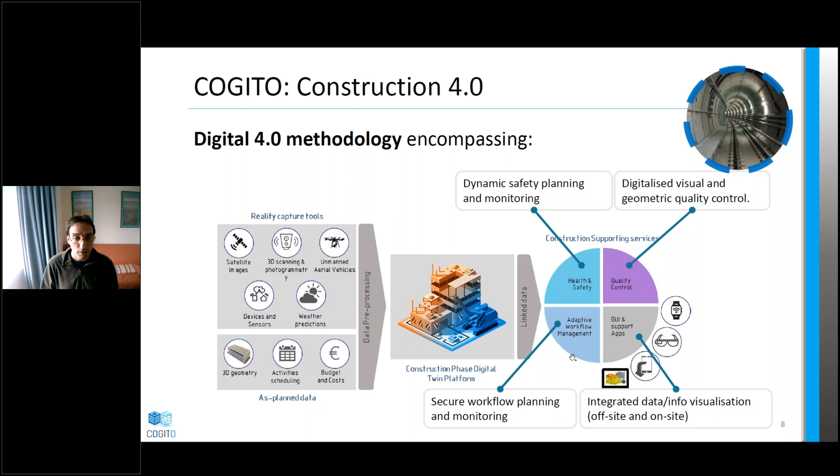And at the lower left, you see workflow management. So this is about securing the workflow planning and automating the monitoring of progress on site and the workflow overall. And finally, at the bottom right corner, we are developing a couple of applications that provide means to visualize the information in the digital twin platform and also interact with it and make some decisions.

To go slightly more into detail, as you can see at the heart of our solution is the digital twin platform. And the solutions we develop can be grouped in 3 ways. The first way is we develop solutions that are applied during the planning phase, so just before construction actually starts. Here, using the planning data, which comes in the form of an as-planned 4D BIM model, we plan safety measures. So we essentially process the BIM model to generate what we call a safe 4D BIM.

We have, I should say first on the right-hand side here, quality control related applications with the aim of planning all the quality control that will need to be conducted during the delivery. And all this information is integrated into some applications for planning the workflow and the work orders in detail.

Now, once the planning phase is finished and we finally start construction, then we similarly have a range of applications that aim this time at monitoring safety during construction, monitoring quality control, that is essentially implementing all the quality control tasks that have been planned during the planning phase. And all this information alongside IoT data, typically location data captured in real time on the construction site, is used to monitor the production and the progress of the construction site and make decisions as to revisit the workflow, optimize it in different ways, etc.

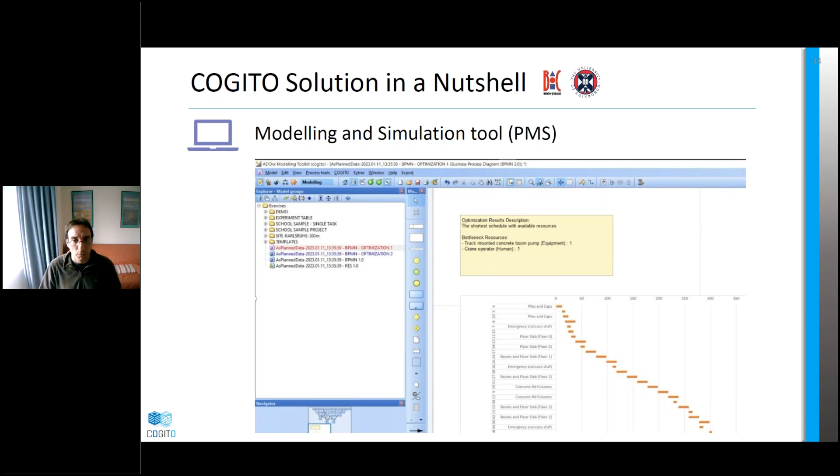As I said, in combination with WODM, we have this service level agreement manager and blockchain smart contract technologies that are there to secure the work orders so that progression and completion of work orders is secure and cannot be hijacked in a way or played with and cheated.

Novitec also develops another sister application, the Work Order Execution Assistant tool, WOEA, which is a mobile app that also runs on augmented reality goggles that is there to inform workers on site about the work orders allocated to them and enables them to report progress on them, and also gives them a range of other facilities in terms of taking pictures, calling somebody to get advice, etc. You'll hear more about this.

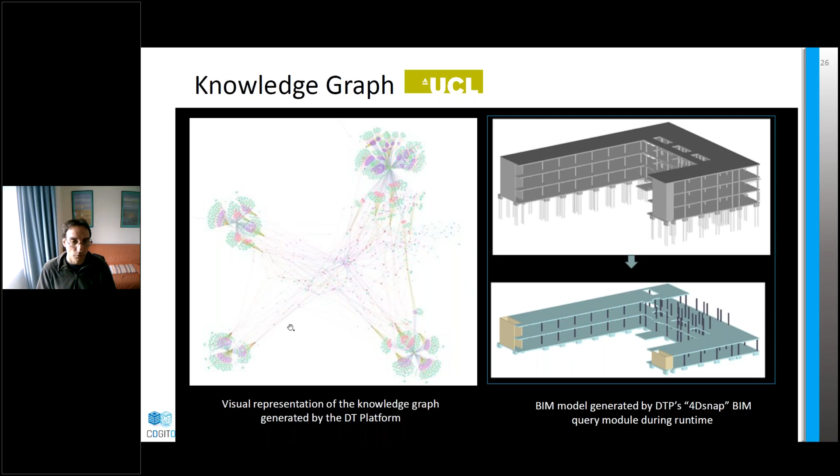So that's me. I hope the introduction was useful to you, and I will now leave my colleague Damiano Falcioni to talk to you about the PMS toolkit.

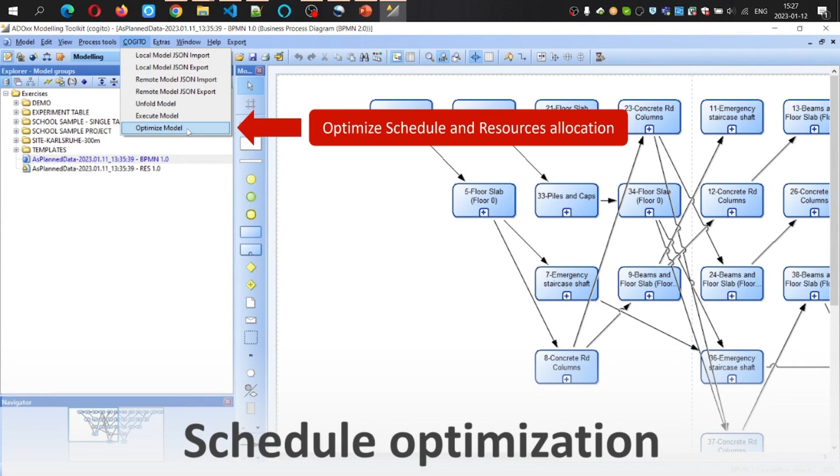As soon as we've completed it, we can proceed with the next part, that is the optimization. The optimization runs in order to find a better schedule alternative.

Actually, the integration with the service was still not finished in this video, so we'll see some manual steps that are not needed currently, like the export of the schedule, the execution of the script manually, and the import of the optimization result. This is all integrated now.

At the end, the optimization will return the identified alternative schedules, two in this case, and a new model will be created for each schedule. Such a model contains the original activity configured by the optimized schedule, and also additional notes like a description of the result - in this case the shortest schedule with available resources, and the bottleneck resources. Also, a Gantt chart of the schedule is provided in order to better visually see the difference with other schedules.

Additionally, there is also information for each activity, like the late start and end time, early start and end time, and whether the activity is critical or not. That is also visible from the red circle near each activity box.

Now we can go to see the other result, which in this case is the cheapest schedule. And here we can see that we have the concrete pump and the crane operator as critical resources.

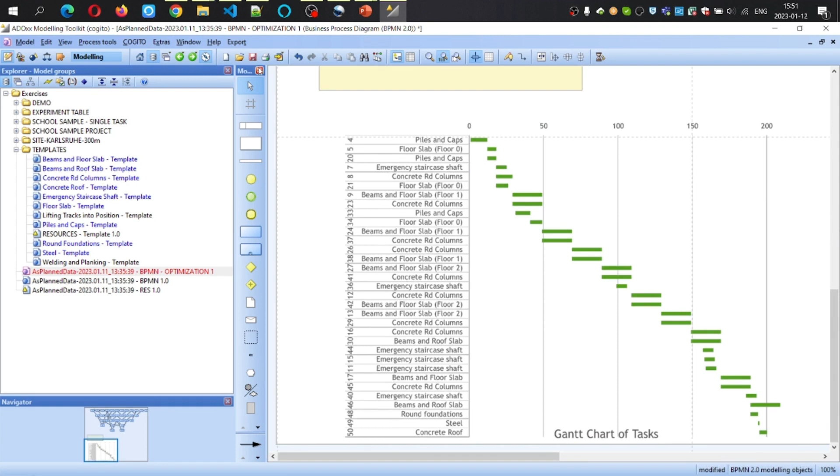Now we are ready to decide which final schedule we want to use, and then we can export it to the digital twin platform for later processing and execution by the other COGITO tools.

Again, we have to log in first to the COGITO platform for this feature, and then select the project where we want to upload the enriched schedule and the model to upload. And after the upload...

What we receive is the ID of the created collection in the COGITO Digital Platform. Just for testing purposes, we can quickly access the Digital Twin Platform to check this by opening the section related to the PMS application and the endpoint for the upload of the schedule.

Here we can see that the new collection has been created, containing our uploaded JSON file of the model.

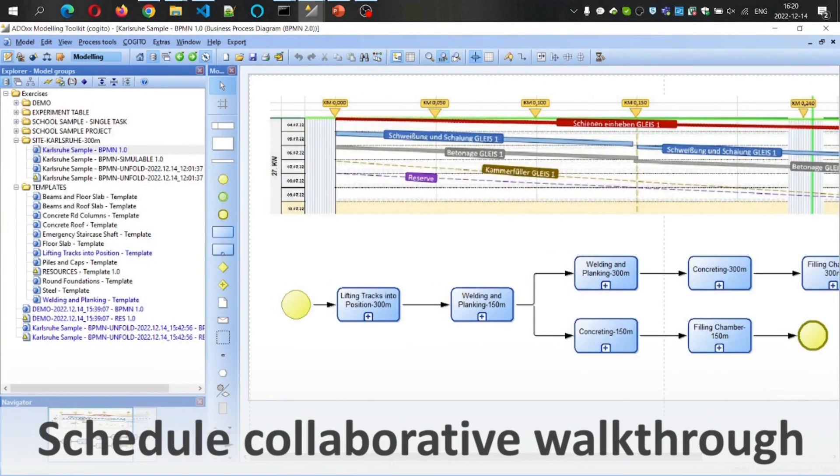One last feature I would like to introduce is the validation of the enriched schedule through a collaborative walkthrough using a design thinking approach.

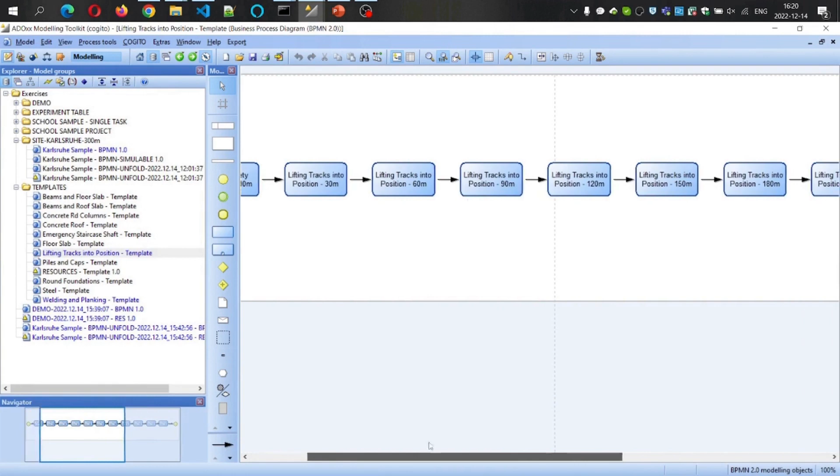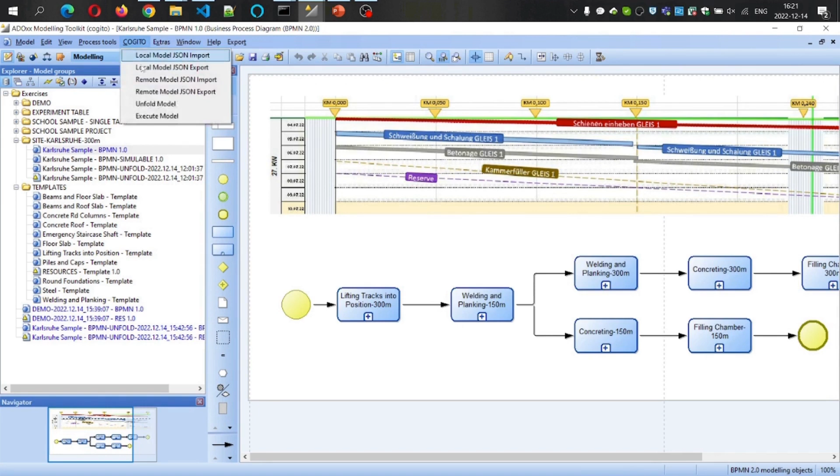For this demo, we use another use case about the construction process in a railway track, where each original activity is again split - like here, the lifting of track into position is split into placement of safety barriers first, followed by the lifting of each track section in sequence, where the crane operator and the worker are used.

We can now go through the schedule, execute it, and generate a report for the execution log. This functionality basically guides us on the activities that we can start, and after the selection we get instructions on how to perform such activity, including the planned start and end time, and the resources that have to be used.

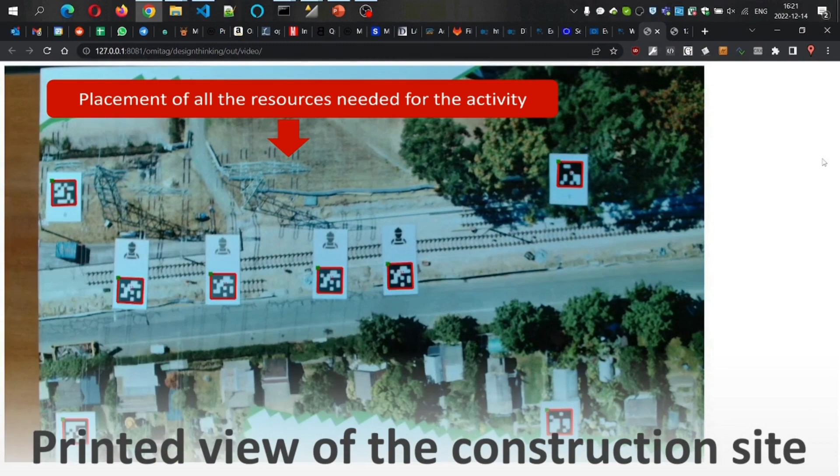We now use this information to recreate the scenario, positioning the needed resources on a printing of the construction site, where the resources are represented as paper figures with unique markers that are recognized by a camera. This camera is used to take a snapshot of the current scene in the form of a model containing the identified resources.

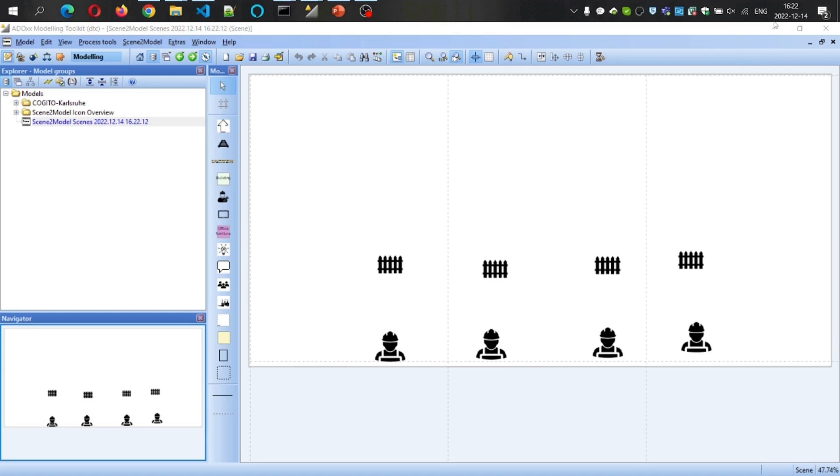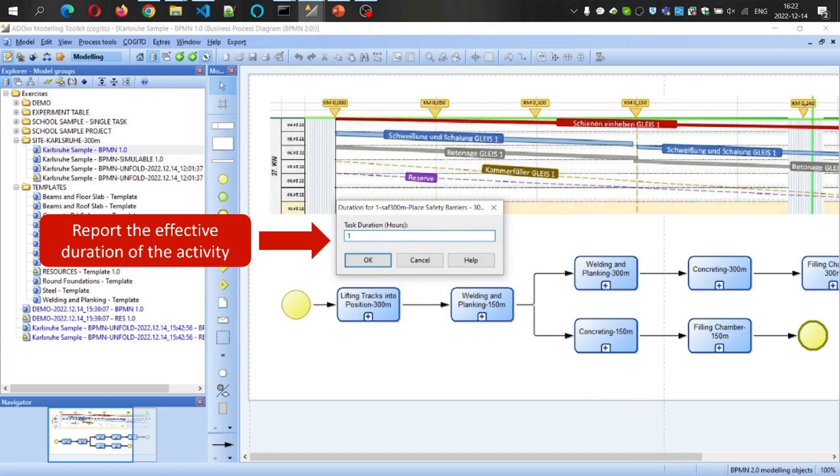Like in this case, we can now set the activity as complete, and also report its actual duration, then proceed with the next activity in the schedule. In this case, for example, we have the crane, the operator, and the worker as resources.

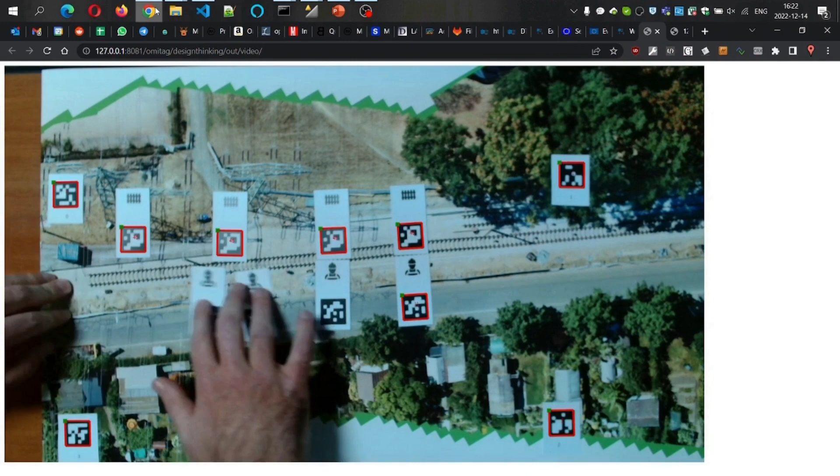So we can go back to our table. We remove the previous worker from the table and place the new resources for the specific railway section. When completed, we take a new screenshot of the scene, like we have done previously.

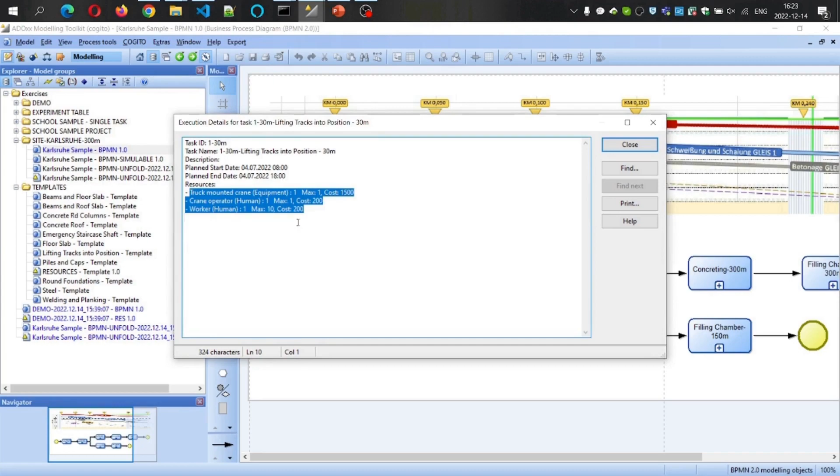So we proceed that way and perform this process until it terminates. At the end, after some refinement, this is what we obtain. The idea is to have a collection of all the scenes of our use case that in sequence form a story.

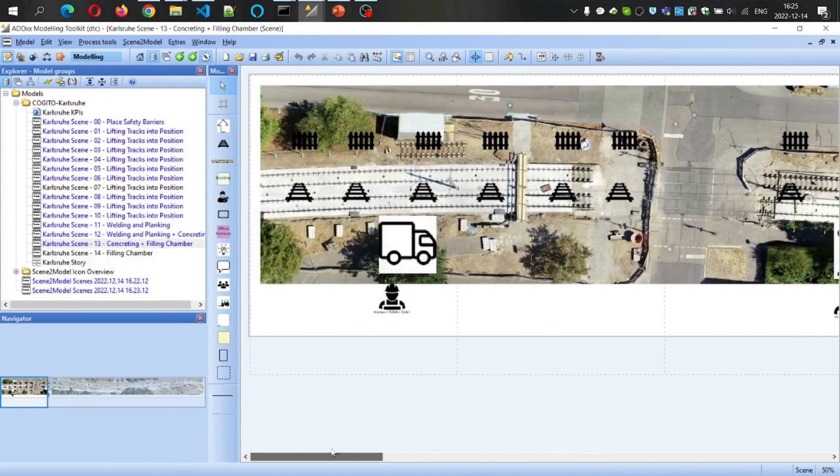This walkthrough can then be used collaboratively for reasoning over the requirements, and also to validate the needed resources, as well as for documentation purposes of the use case. Thank you everyone for your attendance.

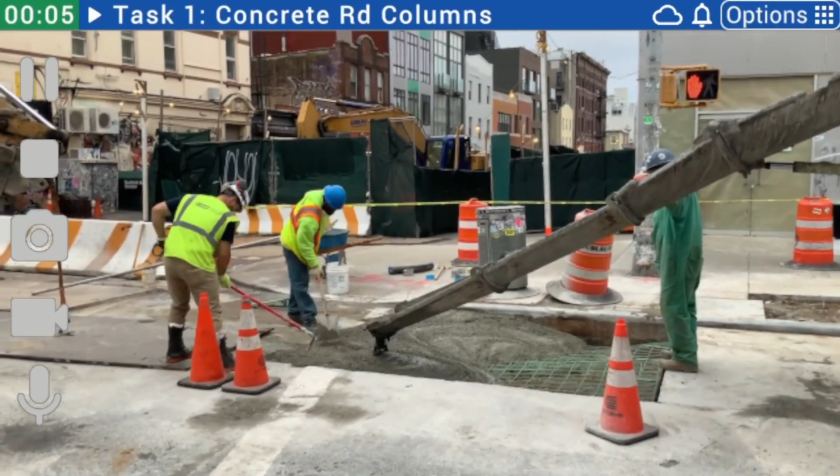Clicking on a menu icon, you can see the various tools that can help you with the execution. For instance, you are able to call any of your available contacts, be it worker or manager, and they can see your camera feed and guide you in your work.

You can also see the task list and check the task details at any time.

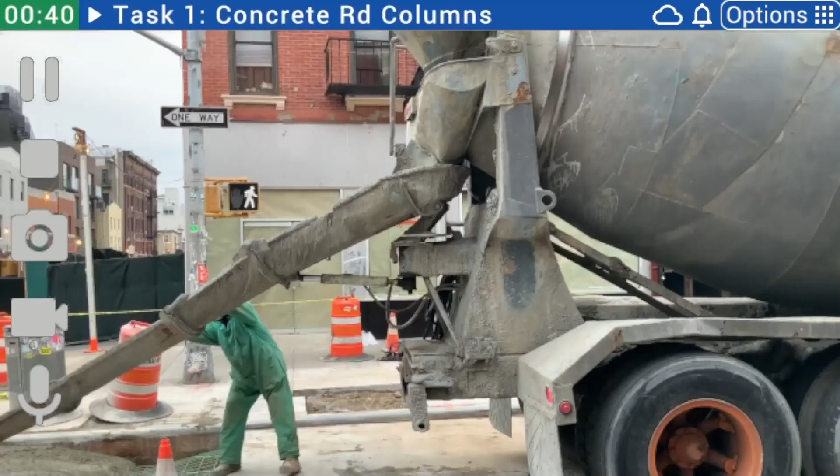Let's say the task execution is finished now and you are ready to end the task. You can leave an optional task result for the managers if needed. Then you select the result of the task, whether it was a success, a failure, or if there's any problem stopping you from the execution.

After finishing the one and only task, the work order is automatically finished. And basically, so is the WOA part of the presentation. We'll go back to the dashboard.